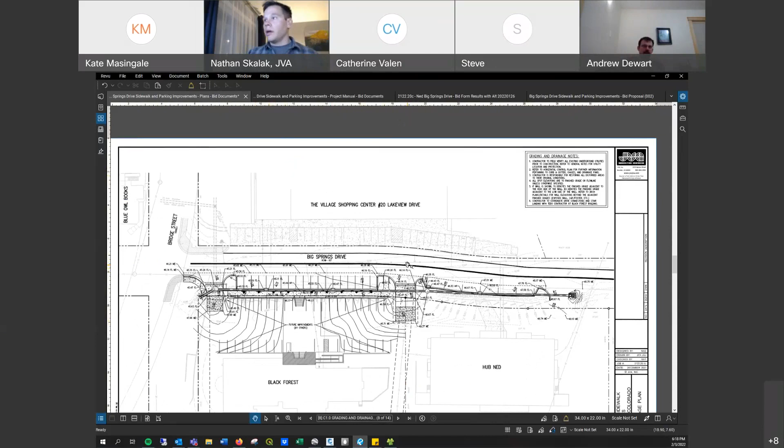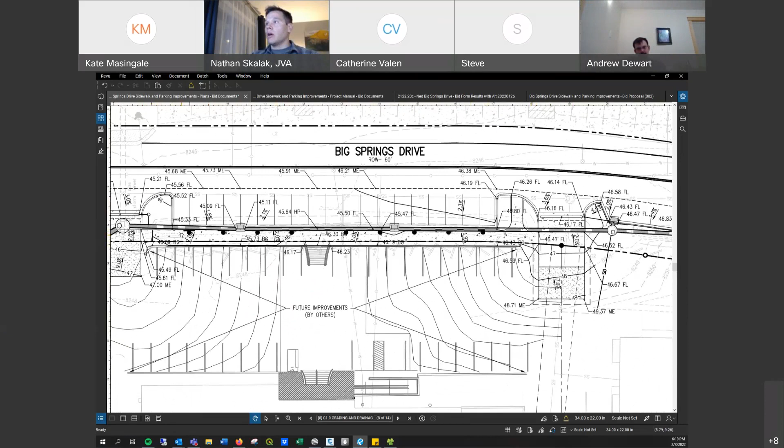So we've got Big Springs Drive here in the middle. With Tebow's project going on at the Black Forest building, they're raising the parking lot and putting in a segmental retaining wall. Totally separate project, but we've coordinated with it because there will be a sidewalk along the front of this building. Sorry, I'm used to zooming and panning around, so forgive the movement here.

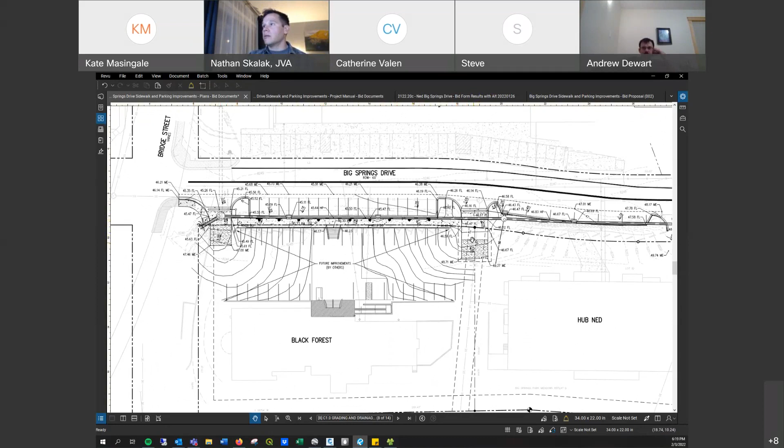Basically it just ties in the walkway that already exists in this corner at Bridge Street, provides a sidewalk across the front, and in front of the future wall at this facility, a little walkway here, and then there'll be concrete paved entrances at both connections to this facility. The sidewalk basically dies off here, and there will be a combination of parallel and perpendicular parking along the roadway.

So there's not as much right-of-way space in front of the hub. We've got the space down here, but essentially the road, we're only extending out about 6 feet, and then capturing the storm drainage and putting it basically directly under where it currently lies in the swale. It is fairly shallow, so we're not really encroaching too deep into the groundwater, and we're not affecting the grade too much in that area, as there's already a lot of parking on the side of the road.

It's been relatively developed in terms of that kind of sandy area. So that's basically the project as a whole. Are there any particular questions in regards to the plan?

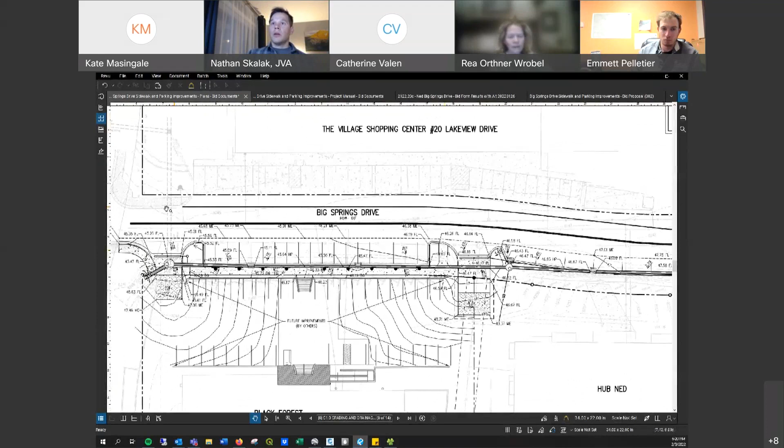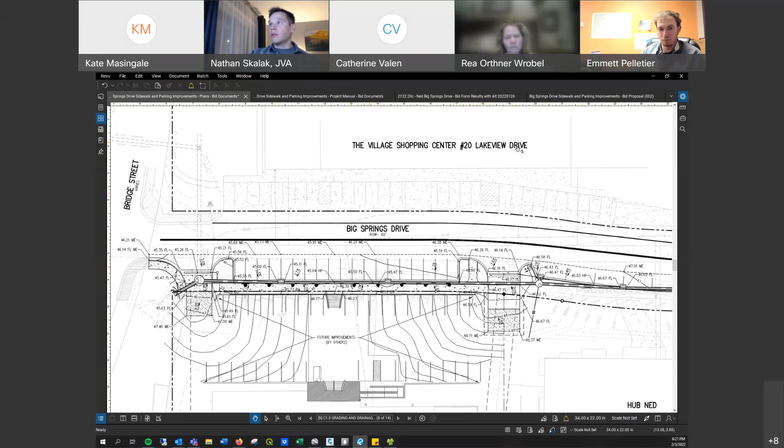What about a crosswalk from in front of the Black Forest where there's a sidewalk going? The sidewalk's gonna end before they hit Hub Ned. So is there gonna be a crosswalk to the north side of the street? What about all the pedestrians — do we need to worry about that, or is that not part of it? Well, there's currently a crosswalk here at the west end. However, I don't think we want to encourage pedestrians walking out into the road at this time. It's a busy intersection, there's a busy roadway already, a lot of vehicles. We want to provide access to get to their vehicles, and maybe in the future, if there's a plan on the other side to provide better connectivity, then that would be an option.

And then all the water from the east side, at the manhole or connection, is gonna flow north underground into that existing pipe. Is that where all the water is going? Yeah, so over here on the west side of Big Springs Drive, there is an existing culvert that crosses. It collects all the water basically coming down the road here, and it's currently acting as a collection basin for some of the water in this area.

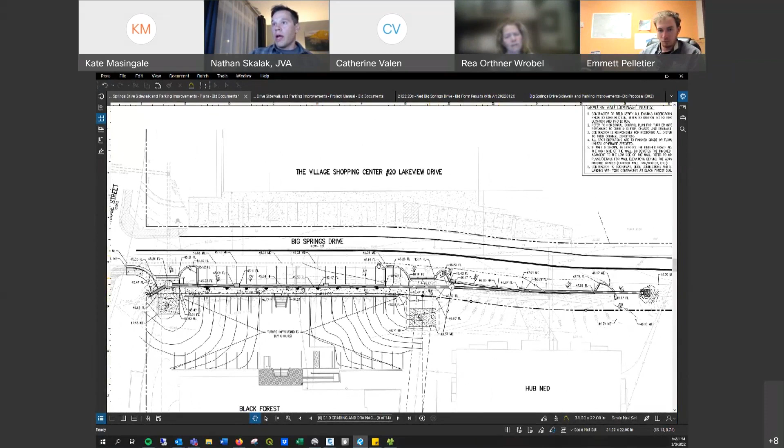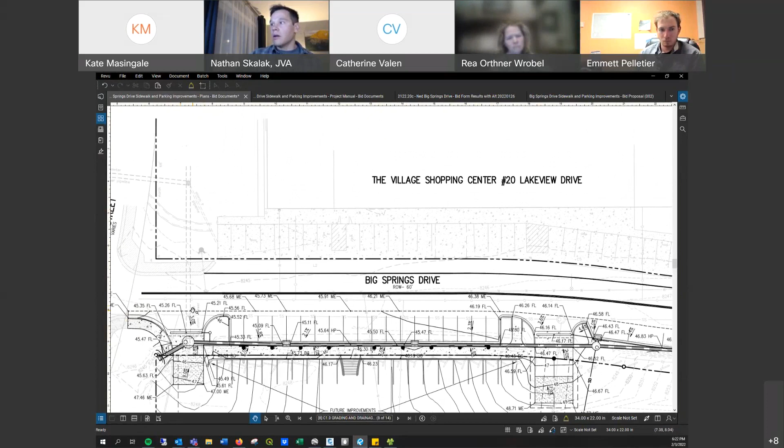So what we're proposing is basically to collect what overland flow we have here into the pipe, collect what's in the road, so we'll capture everything. If you see this divided line here, that's where the grade break is. Instead of sending water directly across into these parking bays, we're going to collect it and convey it to the west side, connecting to the existing storm infrastructure in the ground. This has all been sized, and we've run the drainage calcs on it, so it can hold the capacity of what will be coming down the road and then follow the path to the creek.

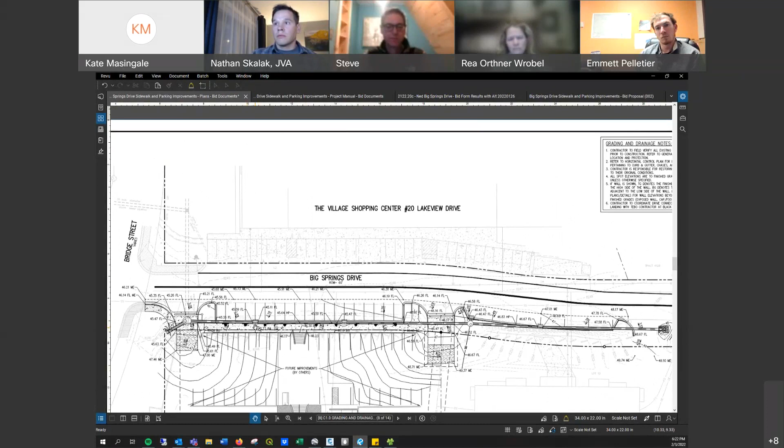Nathan, this is Steve Carell again. Are there any inlets on top of this concrete conduit in front of Tebow's property, the Black Forest and the hub? I'm wondering about the drain runoff from our properties sheeting in a storm. Will that be collected into that concrete conduit somehow?

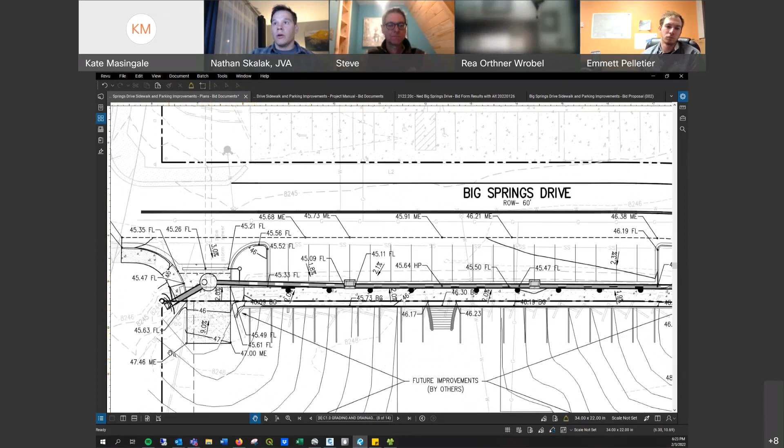Yeah, that's correct. That's a big question, because that's something battled a lot with the storm infrastructure in Nederland. There's a lot of fines and sands on the side of the road that end up being carried by water into the inlets and the storm pipe. With this attempt, at these entrances, knowing water is going to be flowing out of them, we've got trench drains proposed at the low point in front of each drive.

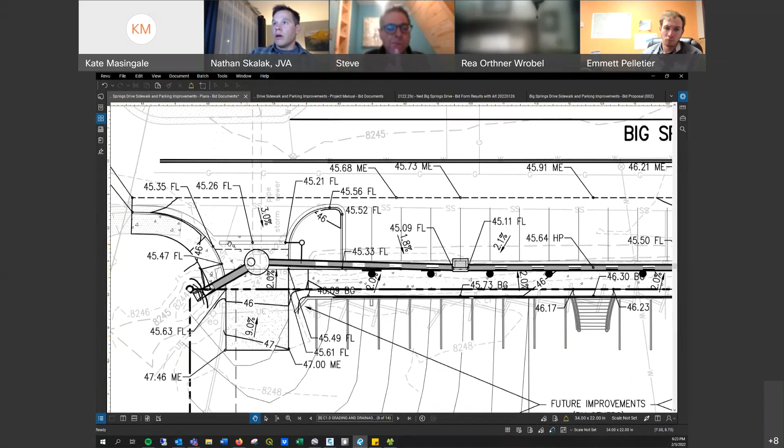So these trench drains here, I can go over to the trench drain detail. Commonly what you see are removable grates, traffic rated removable grates, so all the water can collect there. It won't be overland flow, it'll be collected there and then conveyed into the storm system. This also gives an opportunity to remove the grates and remove the sand from the system so it's not going into the storm drain as well.

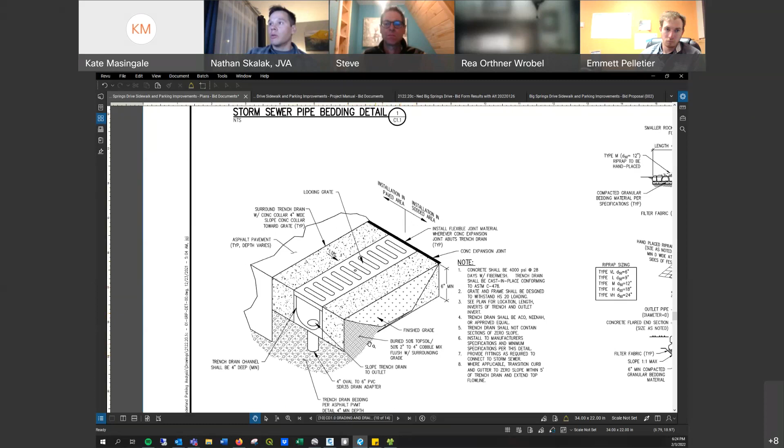This was something I worked on with the town. This is what their preferred approach was to these driveway entrances, knowing that we will get a lot of runoff from those parking lots. Okay, thank you. Yep.

Just a quick mention for Rea: one of the reasons we didn't put a pedestrian crosswalk there is it would be in CDOT right of way, and this project is entirely out of CDOT's right of way. If we had included that in the project, it probably would have taken another 2 years.

Any other questions from board members? I have one more, this is Steve Carell. I was wondering, in front of Hub Ned, will it just be asphalt over, like in front of the rock wall that's out there now? Would that be asphalt over the storm drain, or what is it? I didn't see the detail, I'm sorry.

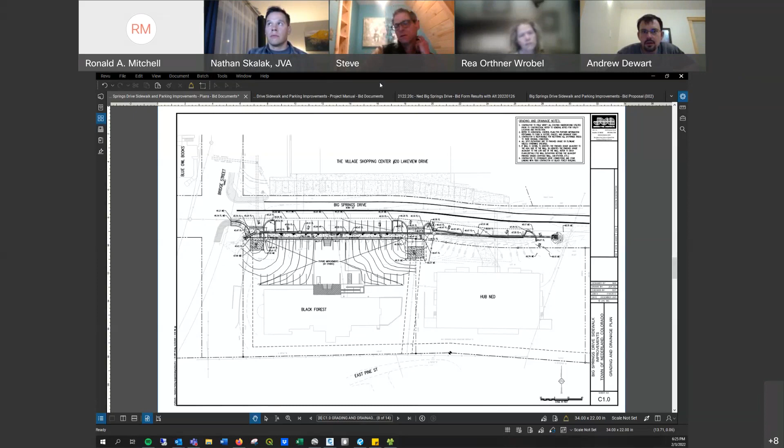For which storm drain? Are you referring to the main one in the road? Yeah, the main one that runs east-west there, in front of the Hub Ned building, because currently we just have an open drain there. So I didn't know if that's going to be asphalt up to the rock wall that's existing.

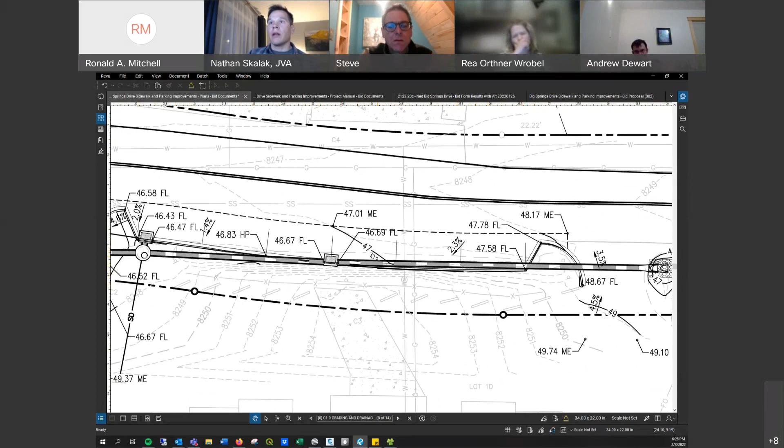Yeah, so that's the reason we're only able to fit parallel parking in this area, because it's tight against the rock wall. You can see here this wall kind of extends out, so we're coming right up to the edge. There'll be a curb and gutter, and then we'll just grade back to the rock wall, but no plan to adjust or move that. This storm pipe will be excavated below it, on the edge, basically in the ditch line that currently exists now. So they'll basically replace the storm drainage in the same location.

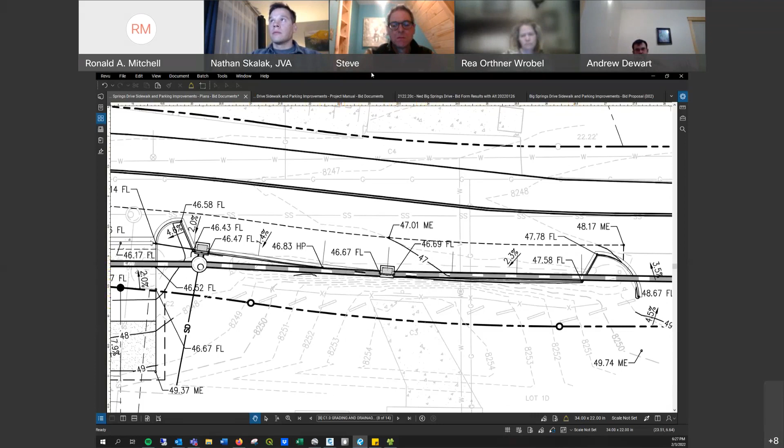Okay, thanks. I guess one other question is, do you all have a sense from the preferred bidder what the timeline looks like for the project?

We haven't spoken in depth with the bidder at this point, but we did receive a schedule of values that breaks down the cost as a whole. The contract documents stated 120 days to complete the project to substantial completion, and then another 60 days to go to final completion. Substantial completion means things are 95 to 99% done, and we're doing a punch walk, catching the loose ends. So that gives them about 4 months.

I think that's very generous. I think this is realistically a 2 to 3 month project, and it'll go pretty quickly. The timeline at that point is dependent on weather. We've requested that contractors hold their pricing until, or the planned schedule is to hold until April, or as weather allows. So we have flexibility in there. It was part of the bidding documents, so I assume that was all accounted for. Hopefully it'll take off when weather permits, April, May period, and then be done early into the summer.

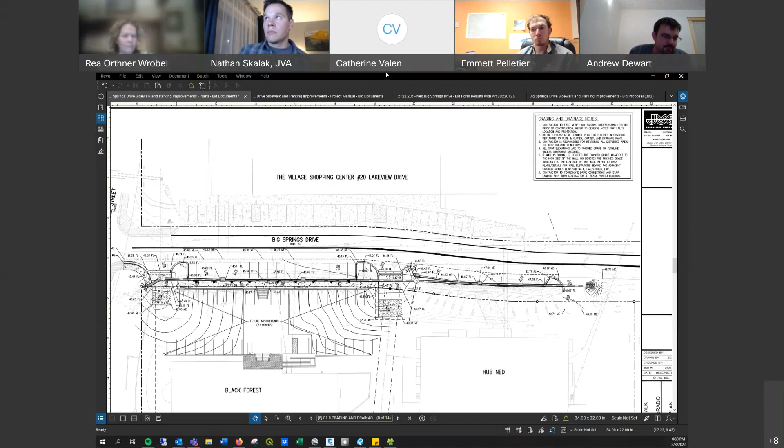I'll answer quickly about our budget. Catherine's question about how did we come up with that, so we were really at that point in September guesstimating a lot with that 256 number. That's why I mentioned we knew it might need an adjustment because we just didn't have a good feeling. I wanted to address that part, that's kind of how that conversation evolved during our budget conversation in September, because we were so dependent on the bid. I'll turn it over to everyone else, but I just wanted to address how we came up with the number in September. Thank you.

As far as opening up for bid again, I appreciate your question, Rea. I don't know if we'd be looking at getting a whole lot of other people bidding. We might, but from a timing perspective, since the current apparent low bid is open to the public, it wouldn't necessarily be that fair to that company to put it out to bid again when their numbers are open for everyone to see and have other people come bid against them. The other bid was like 450 something. Out of, as Nathan mentioned, 40 plus people who downloaded the plans, we had 4 serious people looking at it, and out of those only 2 were able to put together bids. So sometimes I feel we're pretty lucky to have a qualified bidder in the running, because it's not like miles and miles of one thing or another, so it only attracts a certain size contractor.

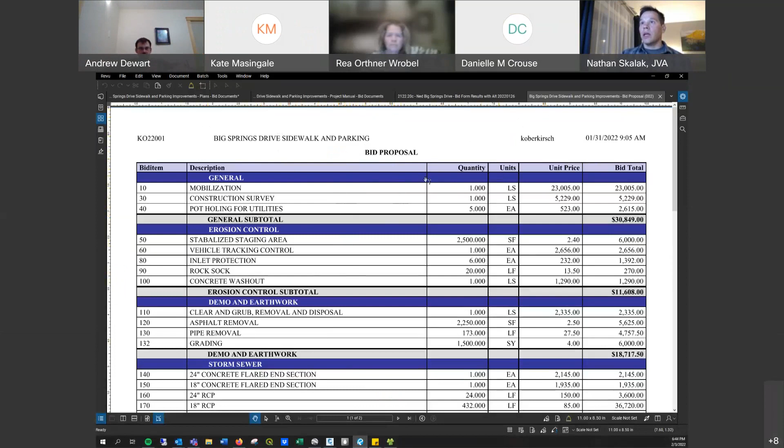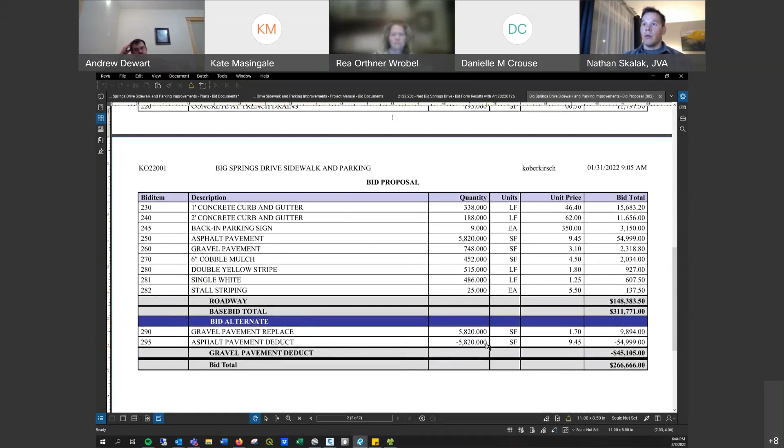So this is from the contractor, Edge Contracting. This is their schedule of values and the breakdown. You can see they've done a pretty good job capturing all the divisions of this particular project, everything from the general conditions, erosion and sediment control during the project, the demo and earthwork, required storm sewer, and the bid alternates that we talked about as well. So I would definitely suggest looking through this and looking at the pricing.

From my perspective, this seems fairly comparable to what project pricing is looking like right now. It's a busy market out there, contractors are very busy these days, and this is a trip for some to come into the mountains, so there's a little additional cost on top of that. It increases the cost of everything from asphalt to concrete, and depending on their suppliers, which they also provided in their bid package as to where some of these sources are being sourced.

It's a pretty detailed breakdown. Basically the deduct would be, there's a difference between removal of the asphalt, which was about $55,000, but there's a gravel pavement replace cost associated with that. So it comes out to a $45,000 difference if the asphalt is removed, and that final number is 266.

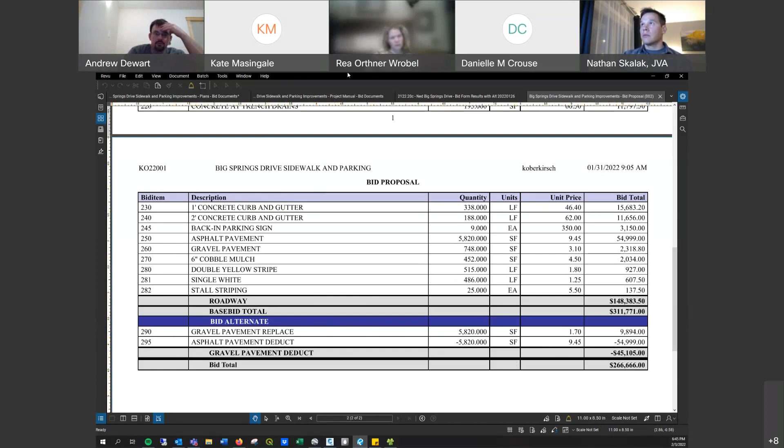I think if we vote to move forward with this, over the next month Emmett can get clarity on areas needing pavement, and he can let us know whether the town can keep it in-house, whichever makes more sense from a cost perspective. That's why we're keeping the total bid number, knowing that pavement's going to cost something one way or the other.

Other questions? I'd say just continue to coordinate with me on the scope of the project, as far as the area to be paved, and anything along those lines. With that, I'll be able to come up with a projected cost.

I would like to present the motion if there's no other questions from anyone. Do we have to do public comment first? All right, go ahead. Public comment, any public comment? Seeing none, hearing none. Ron, you want to make that motion?

I move that we apply to the Board of Trustees for approval of the stated amount and the documents, and that we accept the contractor with the 310,000 approximate bid. Second.